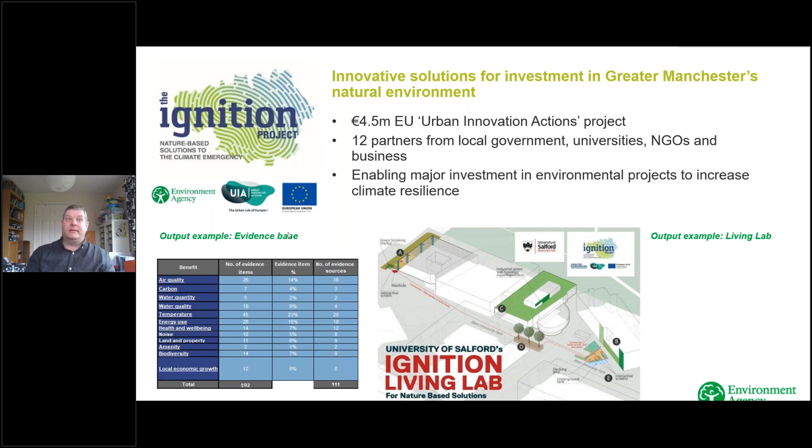And within Ignition, these are called funding streams, and we looked at a number of these. So really here, what we were trying to do was develop business propositions, income around these nature-based solutions. So we've looked at parks, existing and public, and looked at how you can bring more funding in to do more with parks, particularly around their functions for people in the environment and climate resilience.

We looked at green roofs, mapping the city centres of Manchester and Salford to understand at a high level which roof spaces could accommodate quite easily a green roof, and then we provided tools that allowed building owners to actually start to assess their assets. And we did quite a lot on SuDS, and particularly SuDS retrofit, which I'll come to now, looking at both individual sites, SuDS retrofit, and more neighbourhood scale, which is what we're talking about with Walkden.

The project itself had a wide ambition around SuDS anyway from the outset. As you can imagine, it's a climate adaptation project. The ambition here, or what we set out to do, was to design and develop and pilot investment cases, in the multiple, for retrofitting SuDS in GM: replicable, multi-benefit, multi-partner, public and private sector.

Before I go into talking about the co-investment work that we did around neighbourhood scale SuDS, I just want to reflect here, because it starts to again set the scene for what we did with Walkden. We all know that nature delivers value. Some of that's actually financial, monetary value, but we also probably know, and if we didn't, the Ignition project helped focus our minds, it's a long and, as I say, complicated and winding road to capture that value and to get people to pay for it.

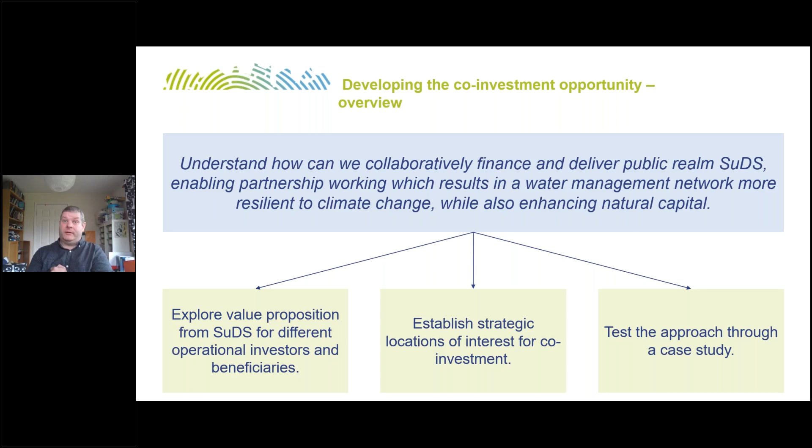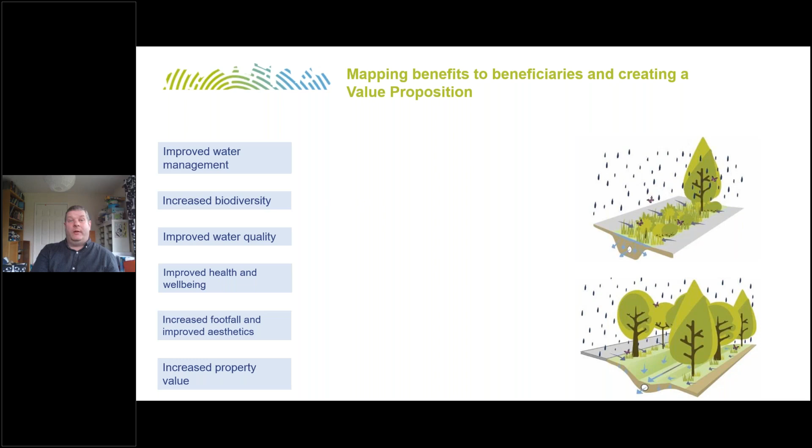And turning to the first thing, we spent some time mapping benefits. This was driven obviously by a quite well-known set of benefits you get from SuDS, which you can see on the left here. Also the evidence base that we'd seen, and we started to try and understand the beneficiaries that we had, locally and more generically, and understand the value proposition for them.

And as you can see, we've probably even missed some of the lines out here. It got quite messy quite quickly, linking up the benefits to the beneficiaries, talking to those beneficiaries about the investment, potentially talking to multiple beneficiaries about investment, all of which have different organisational setups, maybe different regulatory regimes, different funding, different timescales.

And actually those are some of the barriers that we already understood and perceived that we would need to overcome in terms of ignition, in terms of a replicable process that could really deliver this sort of co-investment on the ground in SuDS. We did decide maybe to give ourselves a slightly easier time, to concentrate very specifically on water management benefits and beneficiaries.

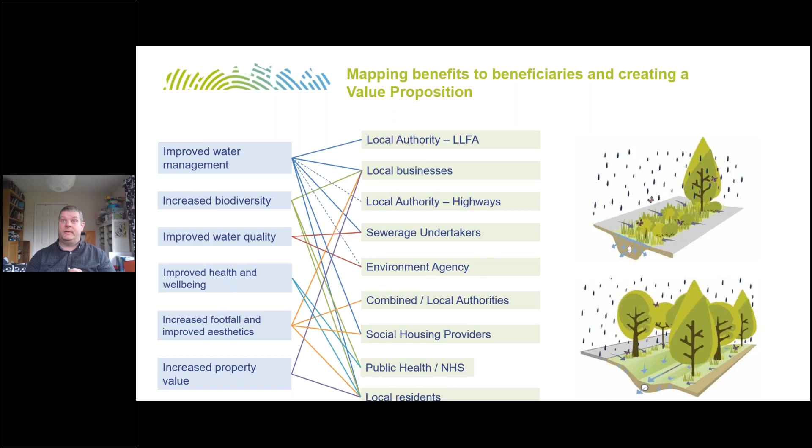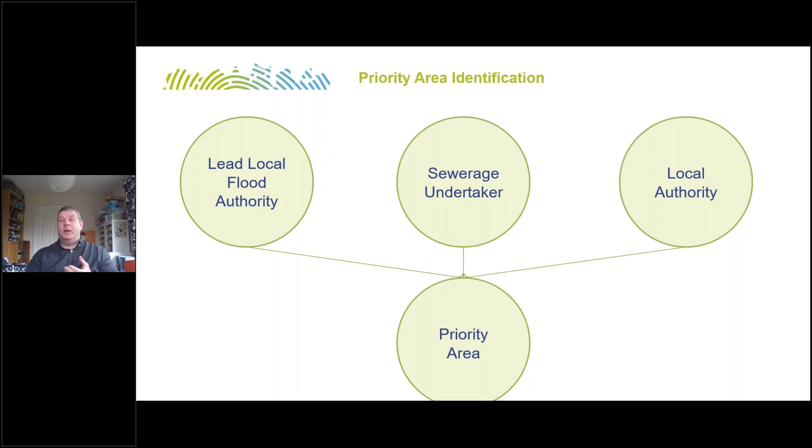So what this led us to do with our local authority partners, Manchester City Council, Salford City Council, and United Utilities, was really to focus on their water management benefits from SuDS, understand how these map together, and really start to drill down into data and evidence, so historic sewer flooding events, surface water flood risk, historic flood events.

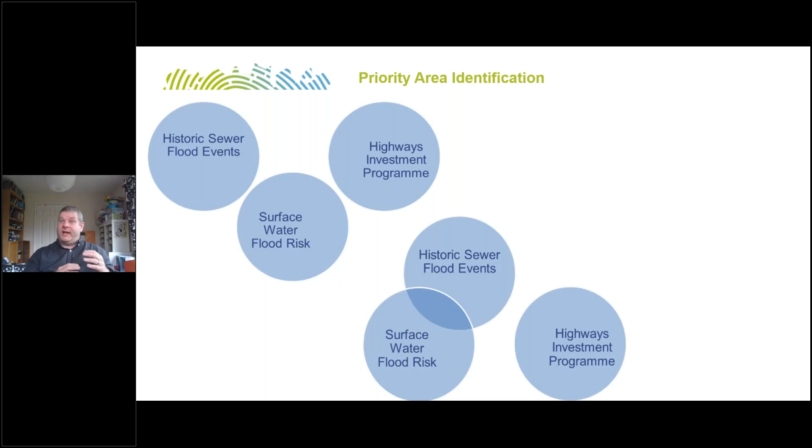We were also very interested in the efficiencies and cost savings that might be achieved through marrying up with grey infrastructure, so highways, who were within the local authority stakeholder group. So looking at highways investment and reconditioning programs, trying to understand where these things exist in space, and where we have all of these things.

And we were really well supported by our project partners in providing this data and helping steer us on this journey, particularly Salford City Council, who have been working around SuDS in highway schemes for some time and doing a lot of thinking, which put them in a really good place to help us get the data, steer us, and help us work with United Utilities.

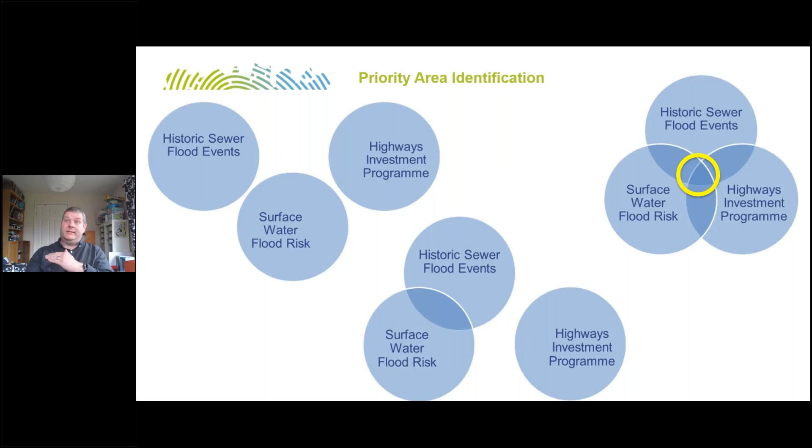And through working closely with Salford and with United Utilities, Walkden was identified as an area where we were getting a lot of those synergies and opportunities existing in one place. At this point, though, we didn't have individual swales or such features or really specific locations. So that was a deeper dive to really understand which neighbourhood we could trial something in. That was the case study.

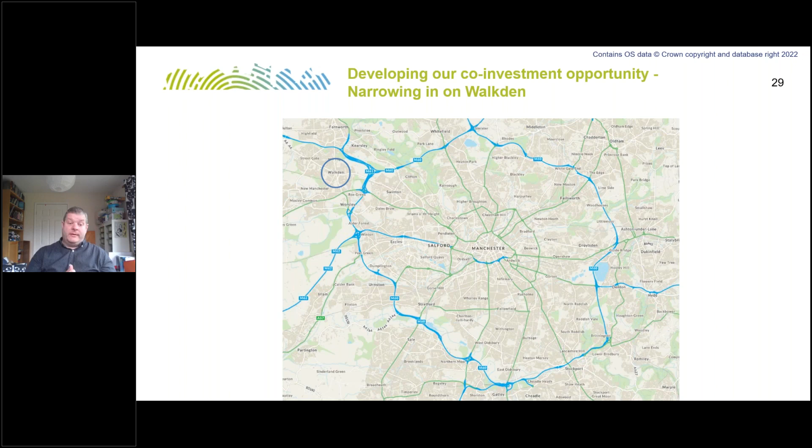That's when we brought on board EPG and HR Wallingford and started to think very much about what might be possible, what the detailed designs and costings might be, and also very importantly, what the performance of any given SuDS neighbourhood scheme would actually do for the various beneficiaries that I spoke about in the previous slides. So that's where we ended up, and I'll hand over now to Phil, who should be able to expand on what we actually did and what we looked at in Walkden.

Hi, I'm Phil Williams. I'm Technical Director at the Environmental Protection Group, and we were asked to look at the retro SuDS planning, conceptual design and cost estimation part of this development. Is it a SuDS presentation without the 4 pillars of SuDS? But it is important to have this in there because we use these 4 pillars to identify and to run our designs against them.

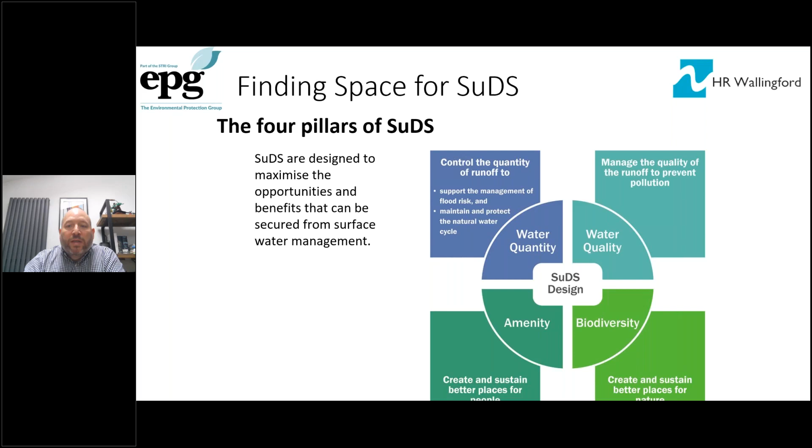So not only were we looking at the water quality and water quantity, we were also looking at the amenity and the biodiversity values of each of the retrofit SuDS principles that we were putting into the area of Walkden, which, borrowing Matt's slide, you can see where it is in regards to Manchester. It's a small town within

Salford, but this image, which was taken from Scalgo, where we use LiDAR, identifies the fall across the site. So the north of Walkden is about 50 metres to 75 metres higher than the south. Some of these falls are fairly steep across some parts of the site, and then it shallows out on other parts. So we had a lot of gravity issues to play with.

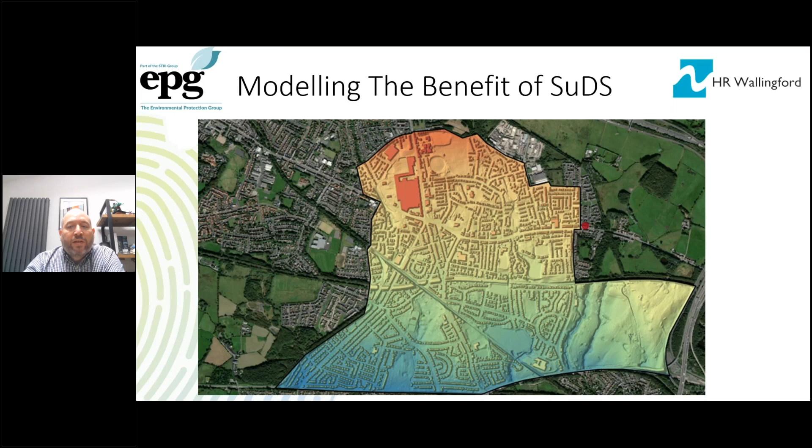We knew that there was a certain direction in which all the water fell, and that allowed us to identify some of the more suitable areas, as well as excluding some of the other areas just for the fact that the gravity system, the falls, didn't work within those areas. So we've got two slides here identifying the sites that we looked at.

So these ones were Wilbraham Road, Mereside Road, Leaside Grove, Springside Road, Whittle Street, and Manchester Road. And Manchester Road is more of the park on Manchester Road rather than the road itself. There are other areas within this site which would have been suitable for SuDS, or on initial aspect looked suitable for SuDS. But one of the most important things, if anyone was going to do this project again, would be physically walking across the site.

And as you walk across the site, you realise some of the constraints that maybe these areas have, that they might be at the top of essentially a catchment with no way water could get into these green areas, or there might be a lot of existing good quality trees, or there might be real potential for a lot of services beneath them.

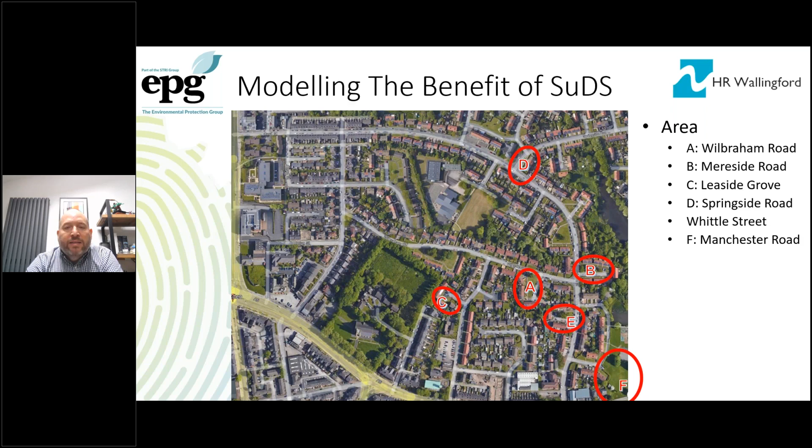So having a site to walk across was critical, and I did that a couple of times, and then myself, Bridget, and the Ignition team also did a final walkover, which allowed us to identify these areas as well. So the area was split by the railway tracks. South of the railway tracks, we had Walkden Park and Ride, Walkden Road, Birch Road, which due to the length of Birch Road, we split east and west, and then Rydal Crescent and Tarn Grove Crossing.

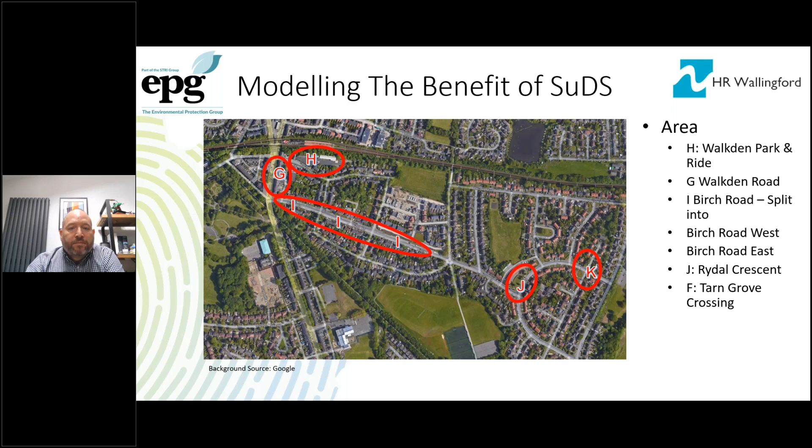We looked at, as part of the site, replicability of the SuDS solutions. We looked at more common SuDS features, so bioretention zones, swales, rain gardens, pervious pavements, tree pits, while keeping some of the more new and unusual ones, such as blue roofs and smart systems, out of the study, just so someone could pick up this project, look at what we've done, and say we can copy that, we can do this design on our area of land without having to have some real key inputs and key understandings.

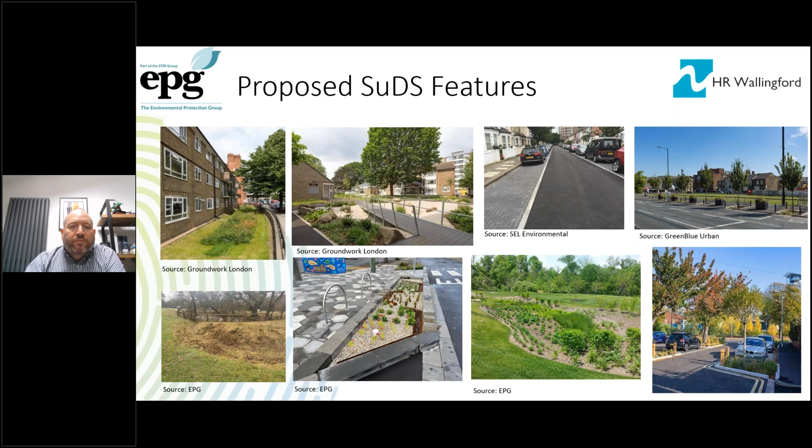So for each of the areas that I identified, we looked at them and we undertook a design. We calculated the attenuation volumes. We then did a cost analysis and then a benefit analysis, and that was for each and every one of them. And what I've done here is I've extracted some of the more unusual ones or ones that give a good flavour of what we've done.

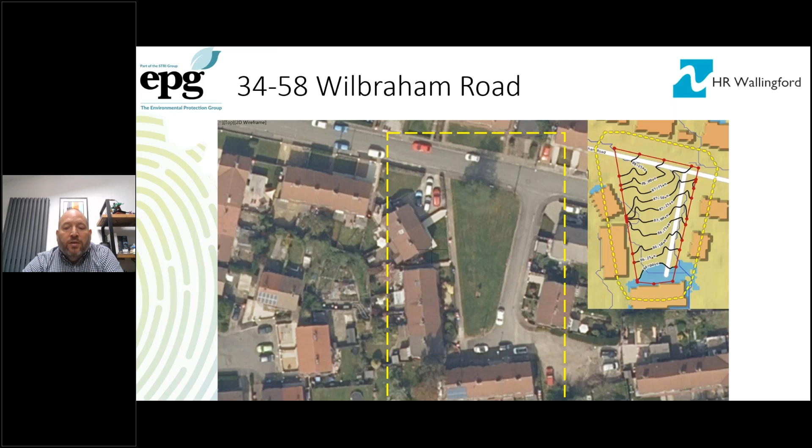So the first one is Wilbraham Road, and we used the same Scalgo LiDAR measurements to look at the falls across the site. So from the top road down to the bottom houses, you're looking at about 3 or 4 meters of fall. We had the site walkover, and as you can see, there's also 2 good quality trees and a new tree there, which we could probably, as we're excavating, pick up and replace and put elsewhere.

We came up with this solution where it was a bioretention zone, which was draining the road to the north and to the east of the site, blocking up a number of the existing gullies there, and then connecting the road into this bioretention feature. Because of that 3-meter fall, we've put in a number of earth check dams, so the water didn't run right the way down through the bioretention zone, overwhelm the bottom of the SuDS feature and then flood the road at the bottom.

The maximum depth of these features varied between 200 mil and 500 mil, but we tried to keep them fairly consistent where possible, at about that 300 mil open water mark during the key peak storm event. And each of these systems would connect back into the United Utilities asset. We used the minimum allowable orifice size of 50 mil to connect into United Utilities. So rather than giving ourselves 1 litre a second, 2 litres a second, we had that minimum orifice plate, and that was the key restriction for these retrofit SuDS features.

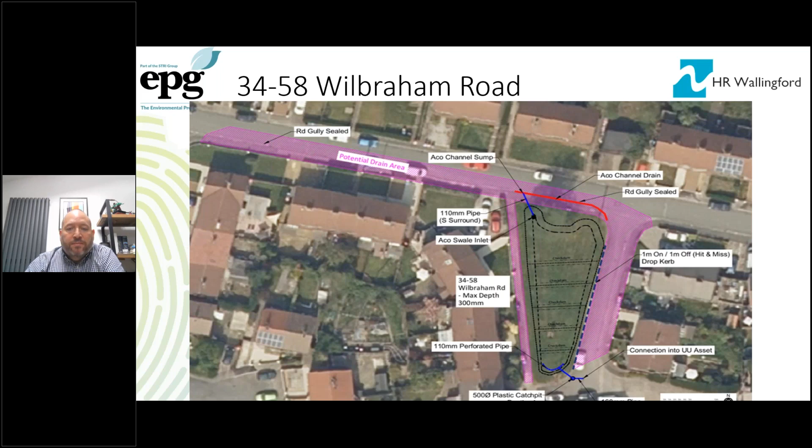We also undertook a landscaping review. So we produced a list of critical and important landscaping planting schemes that you could use on these sites, and they tied into the Salford landscaping scheme. And we produced these nice graphics to show how the site would look when it was finished.

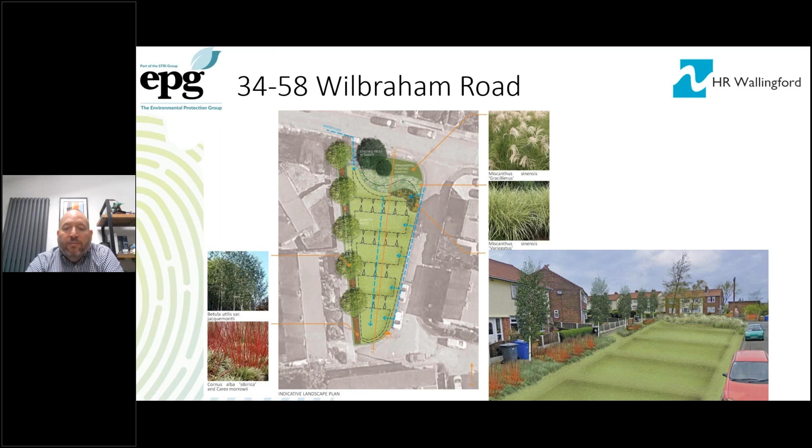One of the big issues when you're doing retrofit SuDS is constraints. Certainly in heavily urbanized areas like Walton, you would have lots of services - water, gas, cable. Some of them will be generally variable in depth, but we're anticipating they start from about 750 millimetres to a metre down below the ground. So keeping things shallow often benefits by avoiding these services.

We also expect some of them will be marked, whereas others won't be. So we anticipate gas would be marked, but maybe cable wouldn't. Obviously, some of the sites we identified we dismissed because of services - one of them had a significant amount of cable boxes and electricity draw pits close by. That would be a real big constraint, and it would be difficult to dig anywhere in that location.

A lot of these areas had natural tree growth, so there didn't seem to be any specific planting arrangement - trees had just grown there over time. Some of them were good quality, some were poor quality. The ones that were poor quality we suggested removing, and the ones that were good quality we designed the features around. But there were some that had been taken down for one reason or another, so there were also tree roots and stumps that would need to be managed when doing the retrofitting.

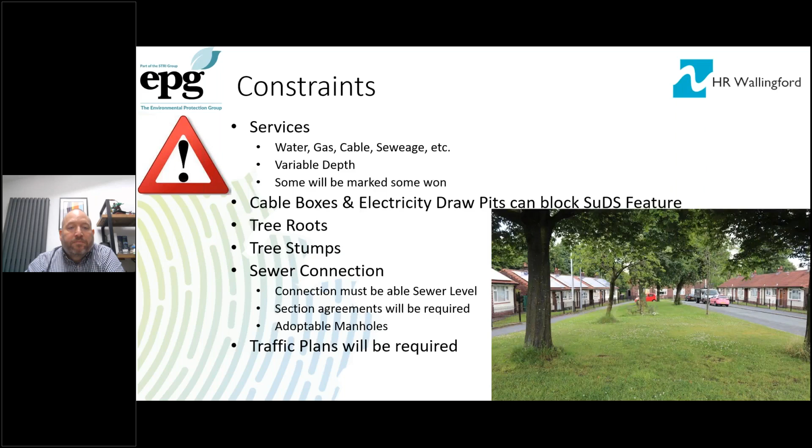One of the things we identified, or we assumed, was that there was no contamination and no high water table. But we would suggest site investigations be done prior to any work on these or any other retrofit SuDS around the Manchester area.

One of the key things is this area is very urbanised. There's a number of schools and primary schools. So on any of these walking routes to the primary schools, we try to keep the depth of the water fairly shallow, just to avoid any health and safety issues with children falling in or hurting themselves. And then when full, we suggested that the velocity of the water movement through the open water was very low as well.

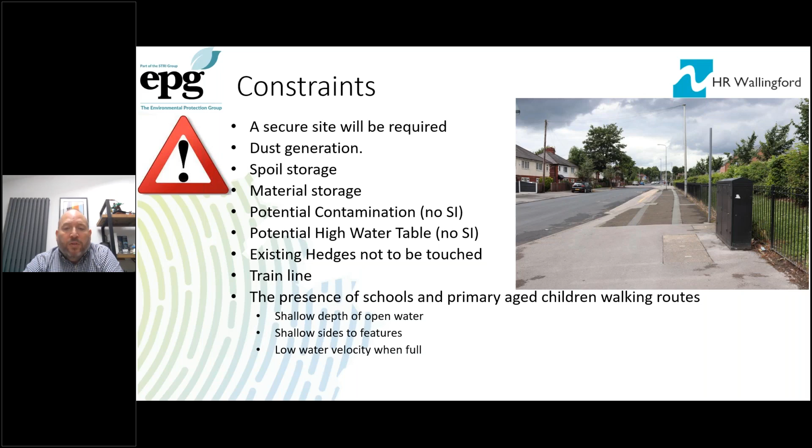What we did for each and every one of these sites is we undertook a cost analysis. So for Wilbraham Road, we identified that there was £13,000 worth of material cost. There was earthworks as a large component, and then on top of that, disposal of the soil. This disposal would increase in cost if there was any contamination, but we considered it clean.

And then we identified an annual maintenance charge cost to maintain this area. One of the things to understand is we tried to keep everywhere as independent, as separate as possible. So someone could come along and do one zone, but that added costs to the earthworks, to the groundworkers' mobilisation costs. So if you were going to do two or more of these retrofits, there would be a cost saving because the groundworker wouldn't need to mobilise twice.

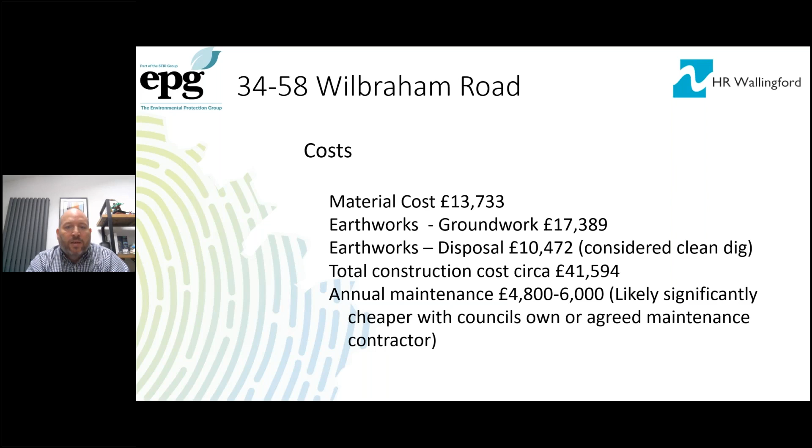We also undertook a BeST analysis - the image might be a little small for you to see, but when you receive the presentation, you'll be able to see it in better quality. It identified the areas of best benefits, and the big one was health. We didn't really look at the best qualities for water management because that's what Bridget will be covering later in this presentation, so we excluded water from our benefits. So this net £17,500 value excludes the water benefits as well - so there is greater value to it than what's being shown here. These are the factored improvements to the locals for having this green space, and the benefits the locals will appreciate from implementing the retrofit SuDS.

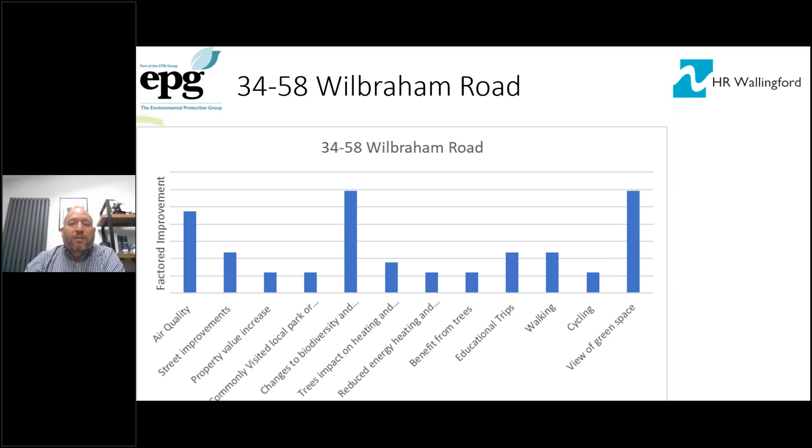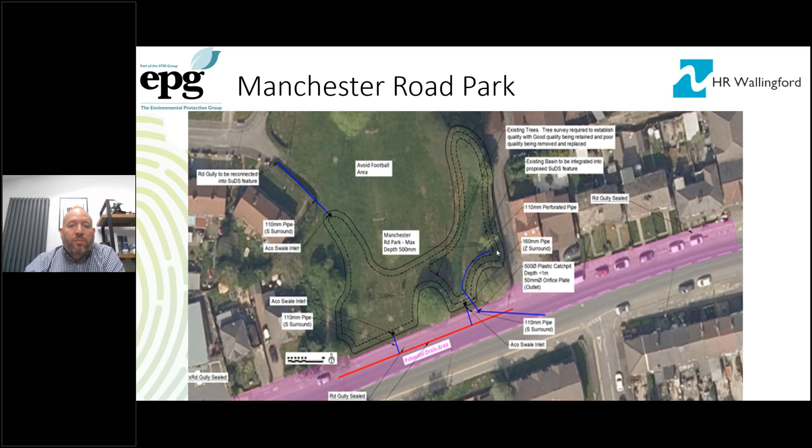The next one we did was Manchester Road Park. This was a large park, but there was an area at the bottom which wasn't being used. So we looked at expanding a large flood retention zone into this area, taking a large area of Manchester Road into this flood retention zone. But what we were key to do is avoid actively used parts of the park, such as the football area and the playground.

Park and Ride was Walton was also looking at retrofitting this industrial estate into a park and ride. So we proposed changing that from just traditional hard standing areas to a pervious solution, and the benefits that would have on the drainage infrastructure, because there would be a significant reduction in volume of water coming from a traditional hard standing impermeable site to one with porous pavement.

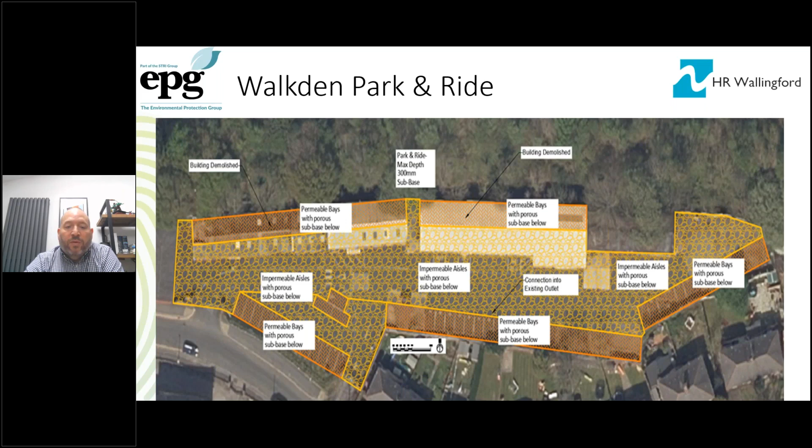What we identified is there's not much of a typical cost uplift for pervious pavement and resin pavement. Resin pavement is quite popular now and has the biggest uplift, whereas it was £10 a square metre uplift for pervious block pavement in comparison to traditional pavement.

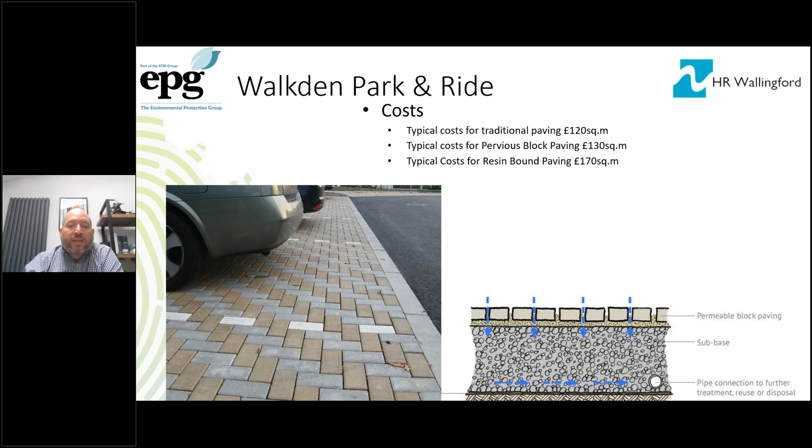One thing to note is that uplift might get eaten into by the fact that type 3, or pervious gravel, is generally 10% more expensive than a traditional type 1, but it also bulks 10% more, so it has a cost neutrality associated with it. You need 10% less type 3 than you would type 1. So you'd probably start to claim back that £10 per square metre by using porous aggregates, which you would need to do.

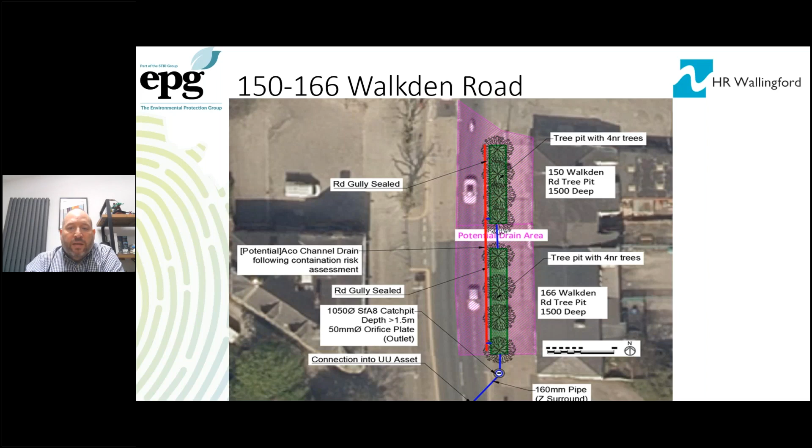We looked at a number of tree pits. The first tree pit area we looked at was the busy Walkden Road, where we went with a traditional in-ground tree pit, banking 2 sets of 4 trees into this area. You can see here we were looking at draining half of the road into these 2 tree pits, and we did a number of sections for these tree pits to show how they would sit within the pavement.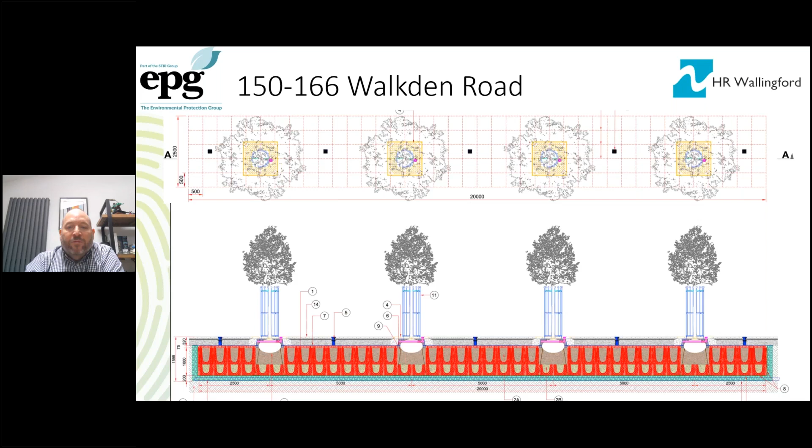What we also did was a graphic to show how it would look now and how it would look once we implemented these tree pits. You can see there's a real big difference to having those tree pits, how much nicer it looks.

Birch Road West is a fairly complex site. It was quite long, and it had a number of existing tree pits, or trees, within it. But the locals were using the wide pavement for car parking, and a number of the trees that were there were generally in poor quality if they were there at all. A lot of them seemed to have been reversed into a number of times and had just died.

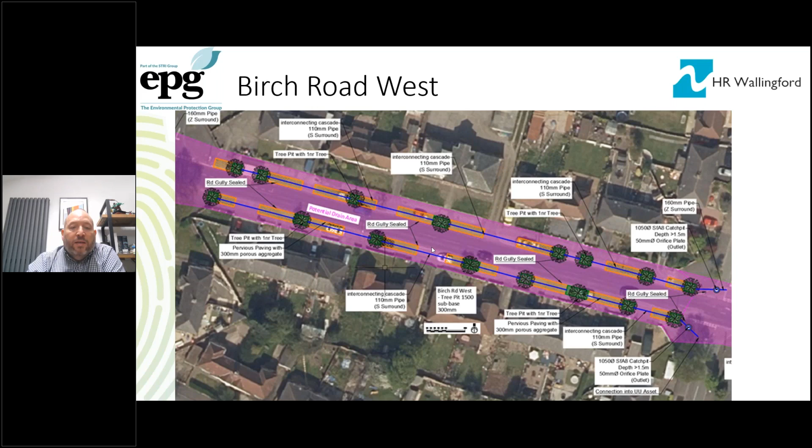So what we proposed is a more formalization of the parking and the tree pits, bringing in pervious pavement again to drain the roads with a tree pit system, with the tree roots sat beneath the pervious pavements. Again, we did a graphic of how it looks now and how it could look. I think you'd agree with me, it looks much better once you start implementing these trees.

Again, we did a full costing analysis for the whole of the site, including the individual tree pits, where it cost for the pervious pavement, the groundwork, and all the ancillaries. As I said previously, each area is priced individually, so if you're doing 2 or more areas, the more areas you're able to do, there is a significant economy of scale savings.

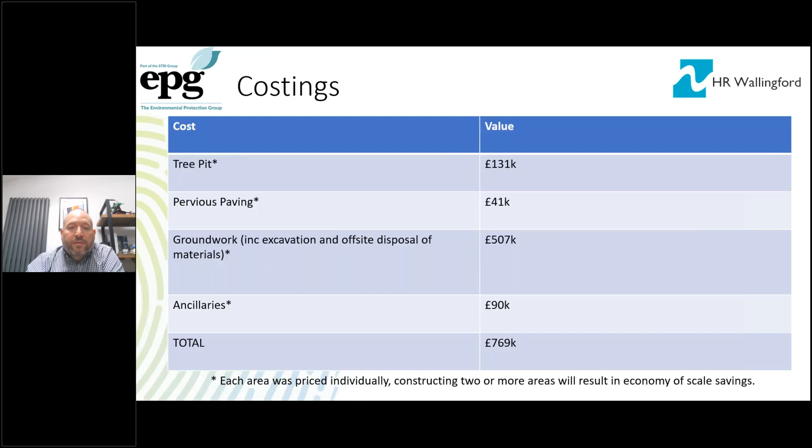And then we did a best value assessment for the site, and Bridget will lead on into this. We didn't look at any of the water benefits or flooding benefits from implementing the SuDS, because Bridget would be looking at that in much greater detail. But one thing we noticed is we used the Bridle and Stringer paper from 2009 to price our trees, because it seemed to give a much better value to a tree than the best figures available at that time.

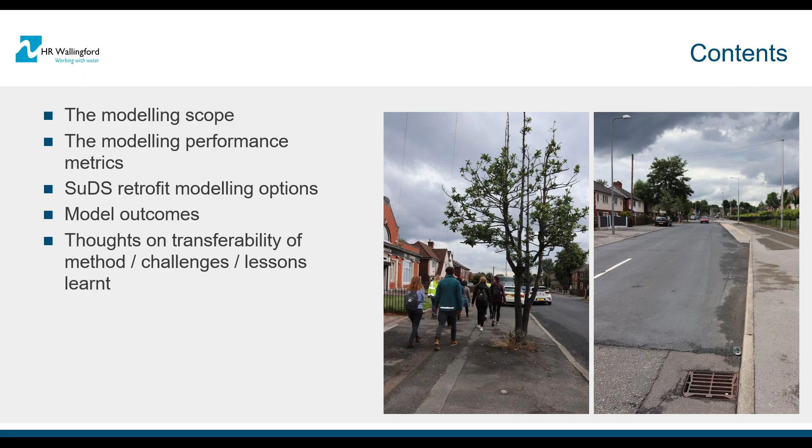What we were doing within the modelling is taking Phil's outline designs of feasible SuDS retrofit solutions for the Walkden pilot study area, and assessing the impact of those SuDS on surface water flood risk. We're looking at the areas of surface water flooding and specifically individual properties and pieces of critical infrastructure. We were looking at the sewer performance from a flooding perspective, and the impact of that flood risk both internally and externally to properties in the area.

We were looking at the combined sewer within the area that the pilot study sat, and how any retrofit interventions might influence that combined sewer overflow performance, and also the flows at any pumping stations in the system, and wastewater treatment works.

To contain and characterise all this, the modelling approach needed to be robust and very clear about what we've done, and replicable to other locations in Greater Manchester if similar pilot studies were rolled out in wider areas.

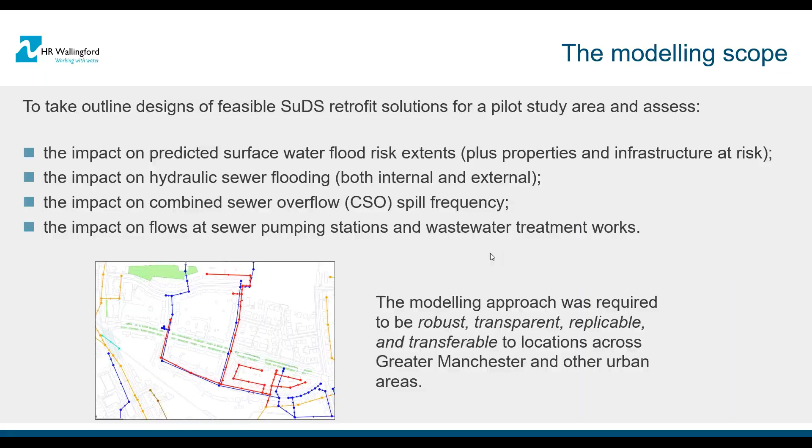These were the performance metrics set out by the stakeholders in the project, what they wanted to see in terms of how the SuDS were influencing the system itself, but also performing individually.

In terms of the SuDS themselves, we were looking at how much volume was being infiltrated at individual locations and attenuated before being transferred back into the sewer.

We were looking at how effective the different SuDS were at different locations in actually capturing runoff, because your SuDS are only going to be highly efficient if they can capture a significant proportion of runoff, and linked to that is how well the storage provided at individual locations was utilised, how efficiently that was utilised in any event.

We looked at surface water flooding in terms of extents, flood depths, property counts, and critical infrastructure counts, both internal and external. We looked at the sewers themselves, the surcharge and flooding return period at sewer nodes, and the actual peak flow rates and volumes within the sewers.

And then we looked at the combined sewer spills, frequencies and volumes, and the pumping volumes as well. So a lot of very detailed metrics, and as you'll see now, those metrics are absolutely key to defining the detail and rigour needed within a modelling approach to ensure that you can extract that sort of information.

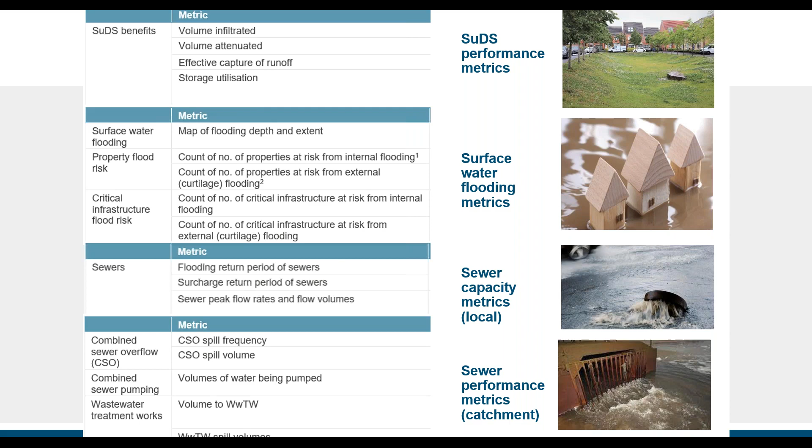So the different types of SuDS models that we considered and reviewed as part of defining this replicable modelling approach for the area - we went right from the very simplest approach to the most complex, looking at the pros and cons and the benefits and constraints of each.

At a very high level, option one is to take an existing sewerage undertaker's one-dimensional 1D model. Most sewerage undertaker models are 1D, so directly using this model without significant adaptation is obviously the simplest, easiest approach. All it requires is removing an area from a runoff subcatchment that represents the area of runoff that would be captured by a SuDS - effectively just taking out and assuming that entire impervious surface area is now not contributing to the sewer.

Option one obviously gives you the highest level of performance efficiency, but it's not necessarily representative of exactly how the SuDS will operate in practice, because clearly SuDS won't take all the water out for every event.

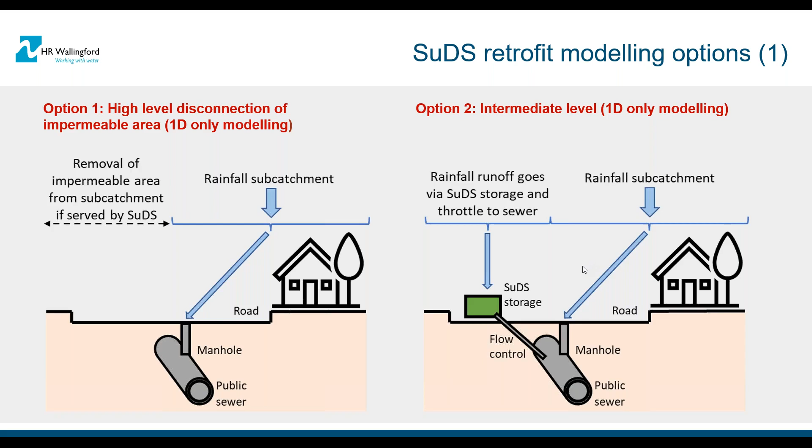Option two becomes a slightly more intermediate level. It's still working with the 1D model only, but you are adding in a storage and a flow control node to all or part of the runoff subcatchment. So you've got a bit more refinement in there, but you're still looking at something which is a very simplified representation of the SuDS in the system.

Option three, included for completeness, doesn't use the sewerage undertaker 1D model at all. There's no sewer representation here. It's just a two-dimensional surface mesh with the SuDS represented either as flow paths in the mesh or as storage, as depressions representing storage.

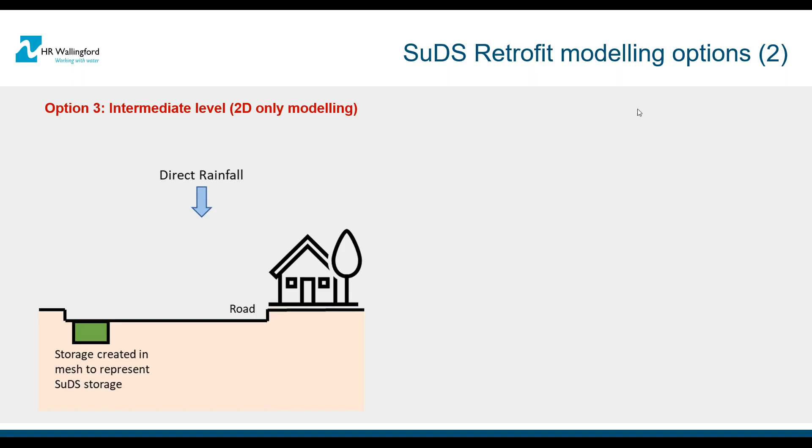Option four is more of an intermediate level. This uses the 1D sewer model but still applies rainfall to the simple subcatchments approach, and also adds a 2D surface mesh that water can be spilled into and out of.

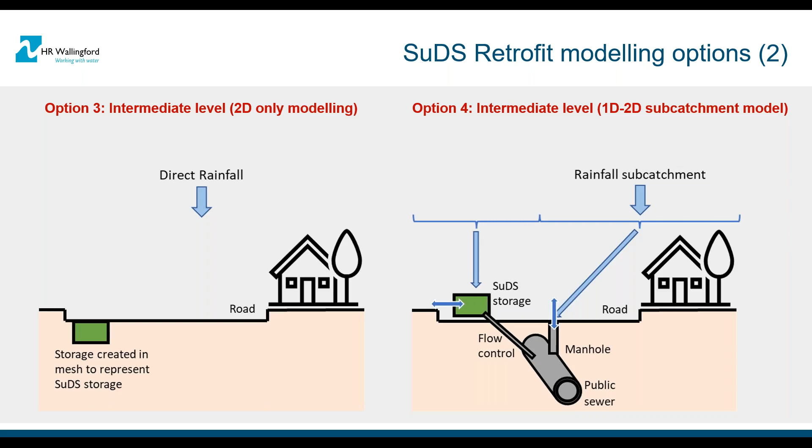The final option is option five, and this is the most detailed and comprehensive representation of SuDS. It's a full 1D-2D linked direct rainfall model where the rainfall is applied directly to the surface, with full representation of the SuDS, the infiltration, the evapotranspiration, and the interaction between the sewer performance, the SuDS performance, and the surface mesh.

So this, as you'll see in the next slide, is the option that allows you to represent all the interactions that are going to give you those performance outcomes that the stakeholders are looking for.

You can see that modelling SuDS requires a different approach to standard drainage modelling if you want to get all the impacts right. That's because the proportion and the rate of runoff into the receiving pipe system is a function of the type and the configuration of the SuDS.

So what you get out of the SuDS is going to be completely dependent on the relative surface area, on the volume, on the flow control rate, on the evaporation and infiltration rate. So a lot of different characteristics.

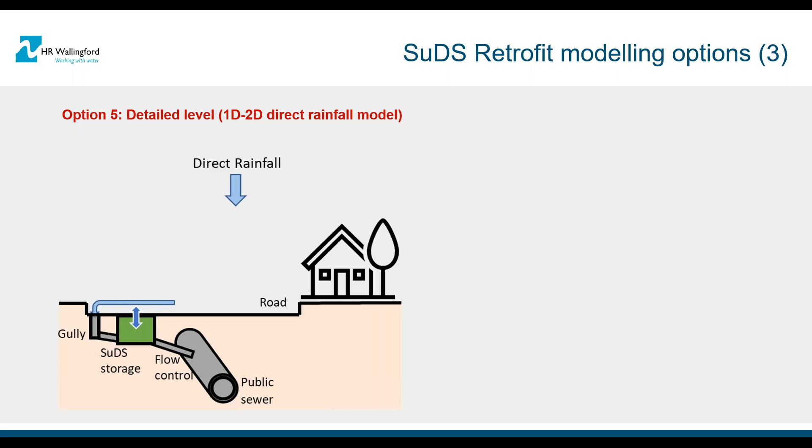This just summarizes what you can and can't get out in terms of parameters from the different options. Sorry, I think one thing has dropped off the bottom, which is pluvial flooding. But what you can see is that it is option 5, this detailed level of modelling, which allows you to get all the parameters, the performance metrics, from the model.

I think it's important to remember at this stage that the use of modelling here is not about option appraisal. It's not about optimizing, seeing how much benefit you can get from the proportion of SuDS or the proportion of impermeable areas served within a catchment.

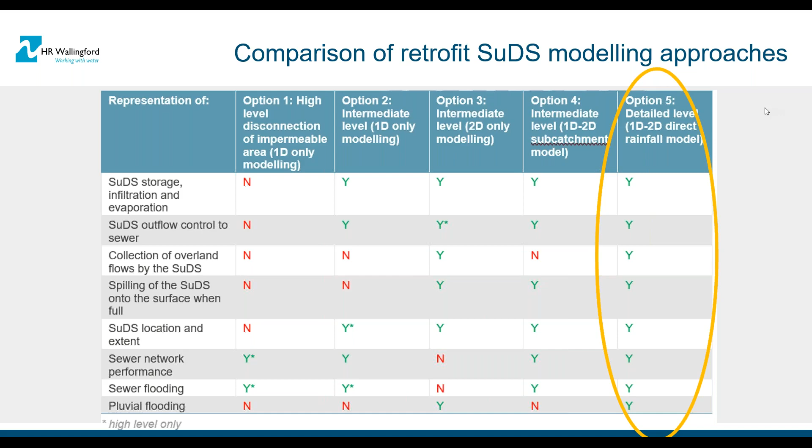This is about taking defined SuDS, defined areas, looking at the maximum volumes we could put in the model, and then looking at the model's specific modelled impacts of those solutions. That's rather different to quite a number of other studies that have already been done using modelling approaches.

So the modelling method we use, very simply, or at a relatively high level in this flowchart, the first three tasks are about how we took the baseline 1D sewer model from United Utilities and adapted it so that we could subsequently include the retrofit SuDS using that option 5 approach.

So we needed to extract the sewer model and see how it performed. We needed to simplify that model, cutting it down so that we had representation of the pilot study area and upstream and downstream areas that either contributed flow to that study area or were key influences on that study area's performance.

That also gave us points downstream where we needed to extract those performance metrics. What we needed to do is extract only the part of the model and the characteristics of the model that we needed to give us those performance metrics. That was crucial to minimise the model runtime, the model complexity, and the number of simulations we needed to undertake, because that was also obviously critical.

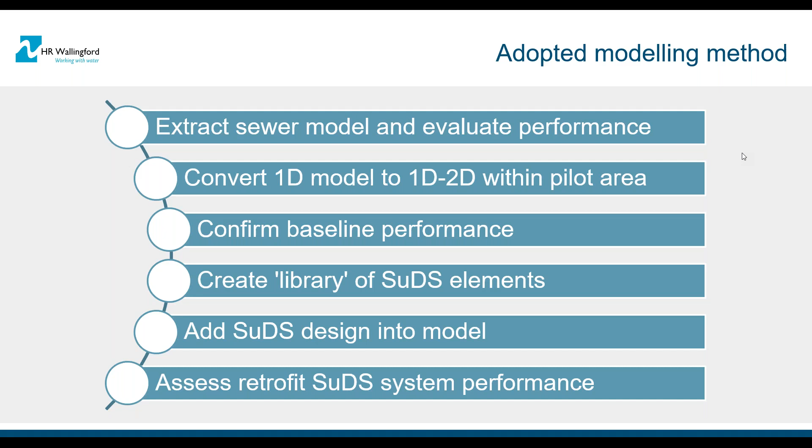Just a little bit about rainfall. We used 3 different rainfall types for the effect assessment of performance.

The first type of rainfall we used was the standard design storms, which would be used routinely for looking at sewerage performance. We looked at both present day and climate change uplifted summer rainfall, and multiple return periods, which were defined in the scope because that's what you needed for their funding application, and multiple durations to ensure that all the critical durations or all the key points in the model area were represented within the model outputs.

This was the rainfall that was then used to assess those surface water flood risk and sewer flooding and surcharge metrics, so that could be compared to the standard outputs from the existing model, the 1D model.

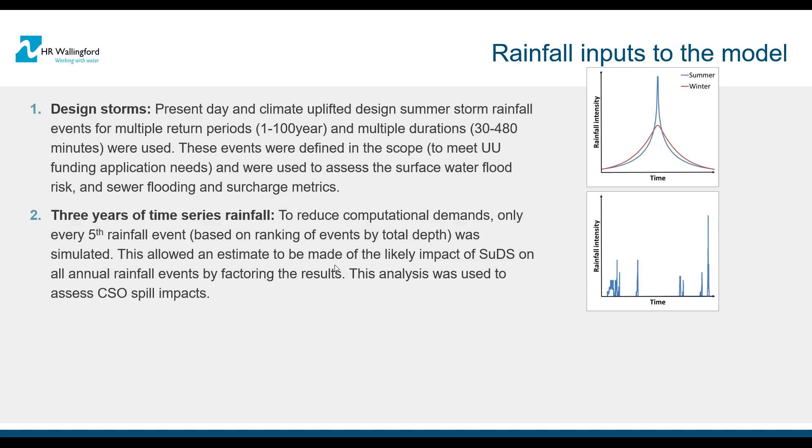We then used 3 years of time series rainfall. But we had to make adjustments to that time series in order to ensure that the computational demand of doing that was realistic. So we got our 3 years of time series of duration of rainfall, but we only picked every 5th rainfall event, based on ranking those events by total depth. That gave us a good picture of the performance of the system over those 3 years, using a range of representative rainfall events.

And that time series rainfall was what was used to assess the CSO spill impacts, the frequency and volumes.

And finally, we picked 2 rainfall events that represented a regular rainfall event in the system, a 4 millimetre event, and also a 12.5 millimetre event, which reflected a significant event that's going to happen maybe 3 or 4 times a year. These two were used to infer the benefits of the SuDS in terms of how much volume they were going to infiltrate and how much volume they were going to attenuate into the receiving sewer.

And those also were used to infer the volumes that were potentially the impact on volumes pumped in the sewer catchment and flows to the wastewater treatment works.

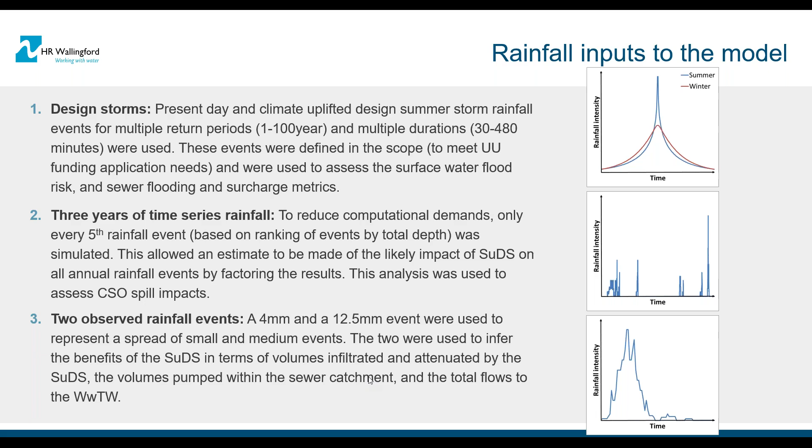In terms of the standard SuDS library, the standard SuDS representation within the model, essentially we had two slightly adapted approaches. One for things like tree pits, where the area of the SuDS was relatively small in comparison to the contributing impervious area, for which evapotranspiration was not included, and for which the area of the SuDS was not taken out of the 2D mesh.

So where the area was not considered significant, we used what we called a point SuDS representation. For larger areas such as swales and large bioretention areas or basins, we used a storage node that had the full area considered. But essentially they were very similar.

A new storage node was included, and that storage included level and plan area elevation curve and the infiltration and evapotranspiration rate. We created new gully nodes to represent curbs that would convey the water from the road into the SuDS. We put in non-return valves and orifices to make sure we were controlling the flow back into the sewer, as Phil has discussed.

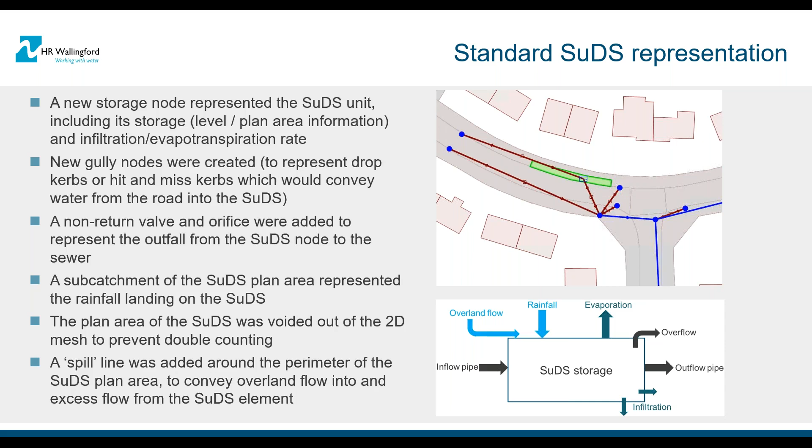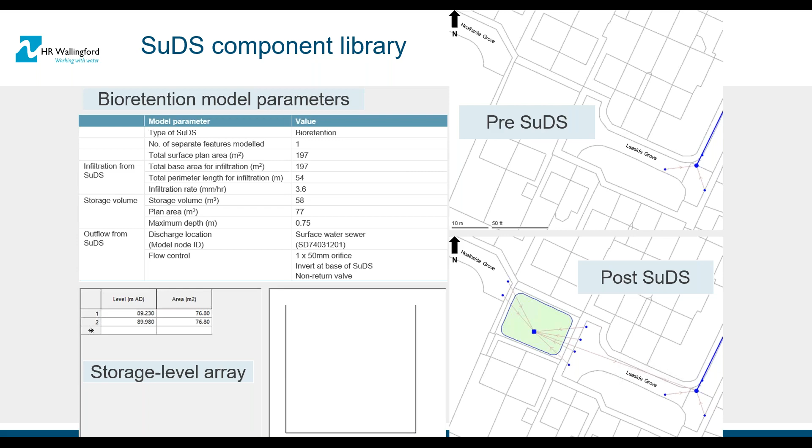And this is what the SuDS component library looked like. For a bioretention zone, you've just got a consistent representation of all the various parameters that you're putting into the model, and then a storage level array, so we've got consistent documentation. We also had consistency in how the nodes and the connectivity between that was defined through the modelling.

On the right-hand side, it's an image of the model as adapted to include the retrofit SuDS, all the connections into the sewer network, and from the new gully nodes. And you can see here this is a location where there's both a combined sewer and a surface water sewer as well. So you can see how closely they lie in the system,

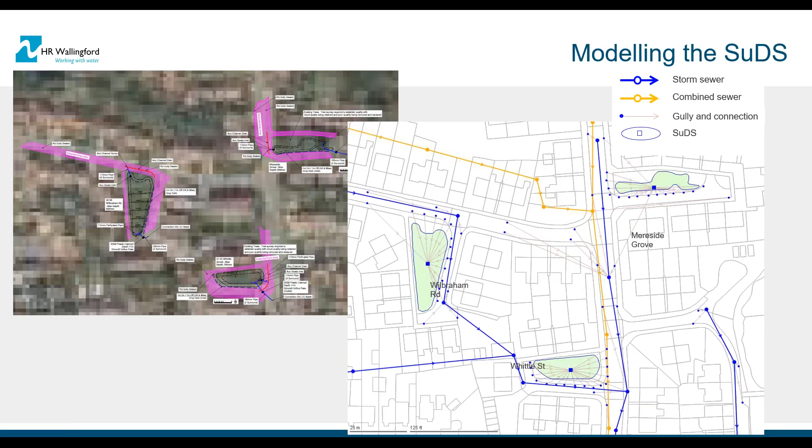and that does add extra complexity. And this is just an image showing Birch Road with its multiple bioretention zones, or tree pits and bioretention zones, going all the way down the street, and the complexity of representing all the surface water interactions with that.

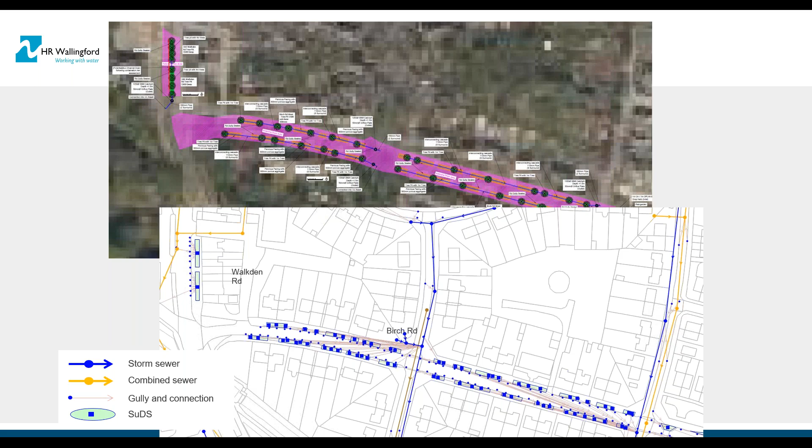Just before I talk about the outcomes, I just thought I'd mention the two different scales of reporting. We're interested in the local area, obviously, and that's the pilot area itself, which is represented on the left. And on the right, it gives you an indication of where that pilot area is in terms of the combined sewer catchments and the wastewater treatment works. So they're very large catchments, total sewer catchments, and there's a relatively small local pilot area that we're dealing with.

So this is just preparing you for the fact that clearly the impact on a much wider network is going to be inevitably limited.

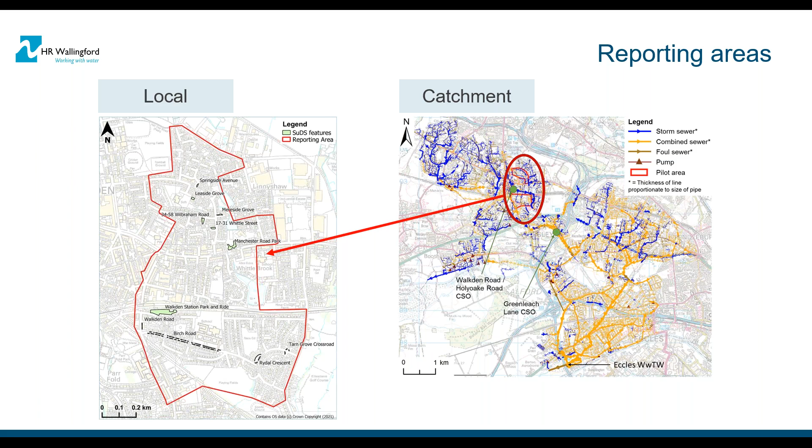And this gives a bit more context for the scale of the SuDS and the scale of the area that they're managing. So we have got a plan area of SuDS proposed, as described by Phil, of over 8,000 meters squared, and that gives us a storage volume within those system components of 1,500 meters cubed, and the impervious area discharging into those SuDS was

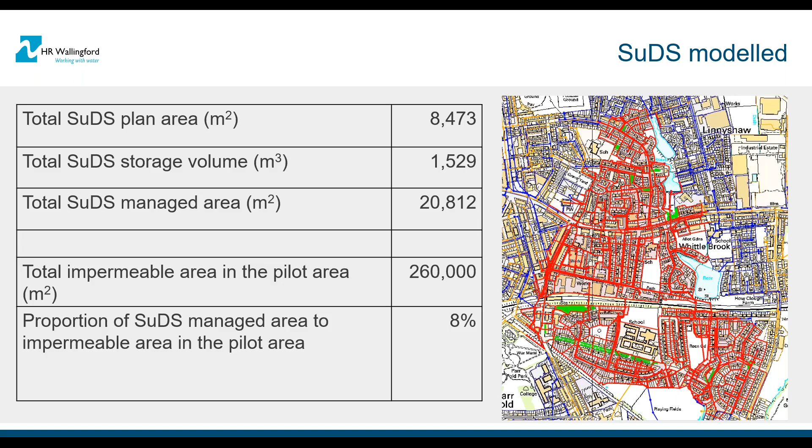nearly 21,000 meters squared. But in contrast to that, the total impermeable area, even in the pilot area itself, is over 250,000 meters squared. So when you compare the proportion of the SuDS managed area to the impermeable area in the pilot area, you're only talking about 8%.

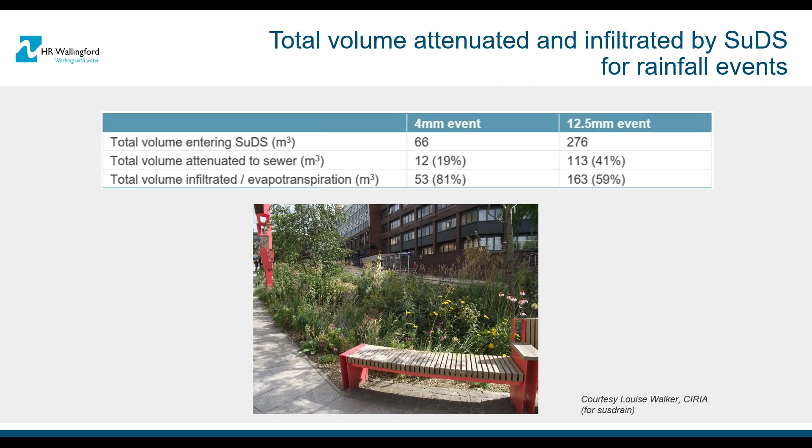Looking at these representative rainfall events, the 4 millimeter event and the 12.5 millimeter event, for the 4 millimeter event, you can see here that the SuDS do really well. They're infiltrating or evapotranspiring over 80% of the event, with less than 20% being attenuated to the sewer, and that evens out a bit for the 12.5 millimeter event, but still being very effective.

In terms of surface water flooding metrics and the proportion of area that's shifting or reducing at different flood depths, you've got a much lower impact, and that reflects the proportion of the impervious area that you're actually managing to intercept, but also is a function of where those flooded areas are.

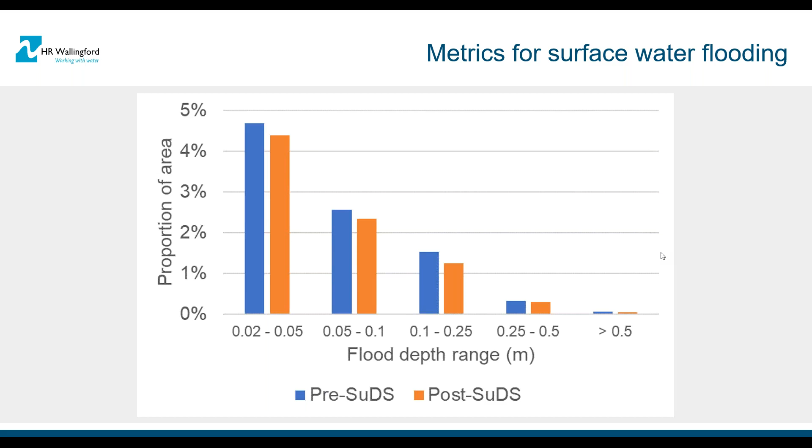So these SuDS were selected based on many different characteristics and many different drivers, and the schemes weren't specifically designed to address a specific flooding problem. So how well they did at reducing surface water flooding was almost an extra benefit rather than a specific objective for the individual locations.

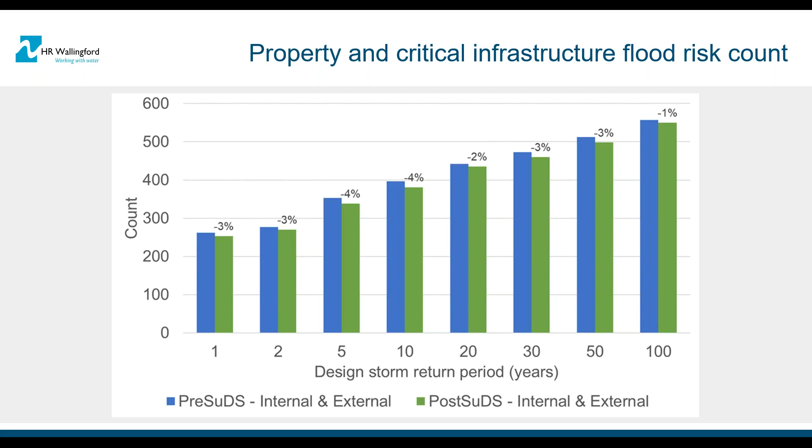And again, you can see here that you're getting reductions, you're getting improvements, but they're relatively small, not huge changes that you're looking at here.

So it is, as you would expect, reflective of how much of that upstream area you're actually dealing with, and also whether the system is a separate sewer system or has substantive flows within the combined system, where you're going to have less of an impact.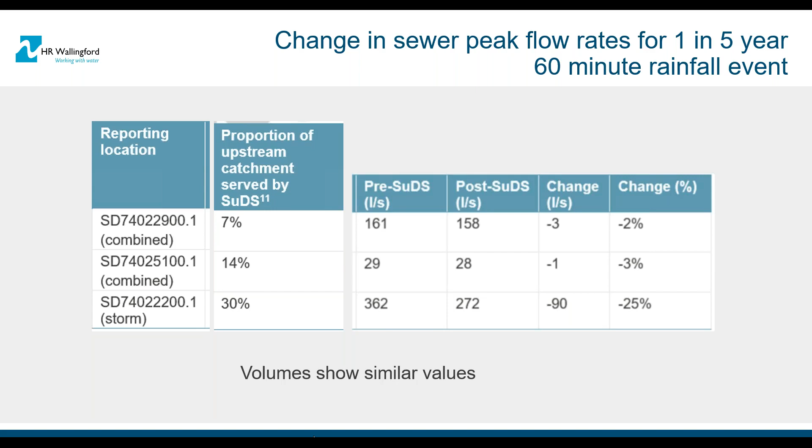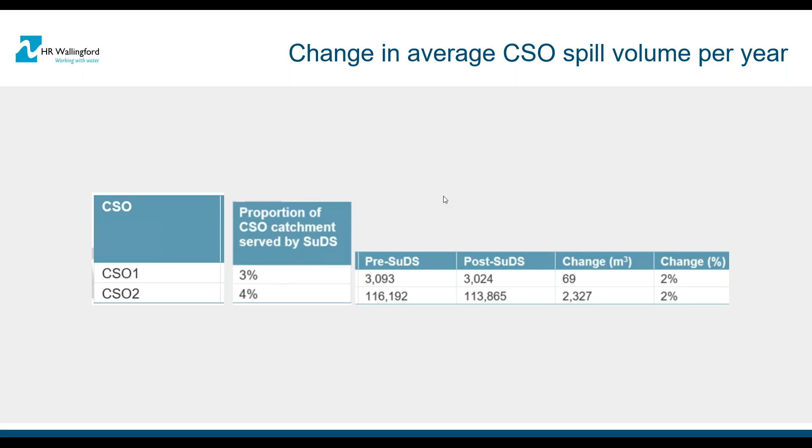In terms of CSO spill volumes, we're recognising that the pilot study SuDS area is a very small proportion of the combined sewer catchment, and therefore the change of 2% in the right-hand column is commensurate with the level of management being afforded by the SuDS.

So in terms of lessons learned, I think we learned a lot from undertaking the study. What we would probably say is that the value of taking a nested approach is really clear. So use simpler modelling options to give you an overview of the possible or potential benefits offered by different SuDS pilot areas, different locations, different types, and that's a really important first step.

And also as a mechanism to give you more understanding of the system and the likely benefits, so that you can potentially cut down on the metrics and the simulations to be carried out using the detailed modelling. But with the current sort of funding model and the needs of that funding model, detailed analysis is obviously needed.

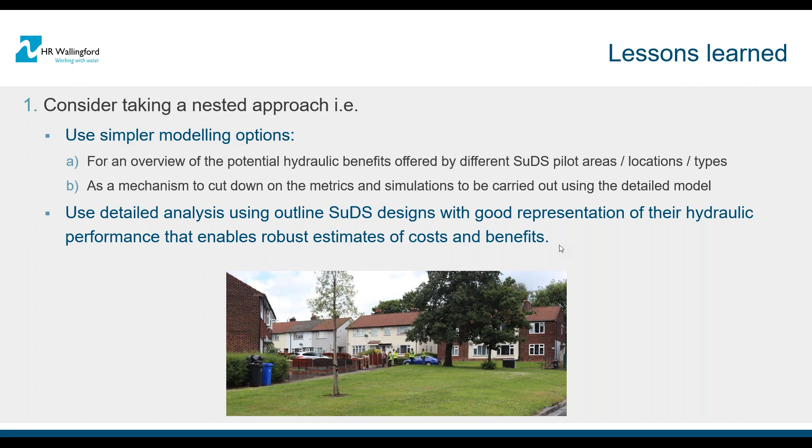But having taken the simpler approach, you can then use that detailed analysis to put in your outline SuDS design and provide a good representation of that hydraulic performance that will enable you to have a robust estimate of both the cost from Phil's work, but also the benefits to the receiving sewers and flooding.

The other thing that we would say from this is the importance of using time series rainfall and how much richer the information on SuDS impact is from using time series rainfall than you're going to get from design storms. That time series rainfall is going to reflect all the antecedent conditions in the SuDS prior to the events occurring.

It's going to allow you to look at the combined effects of different critical durations in the system, because we need to recognise that SuDS and storage systems and pipe systems will be under stress at different duration events. Time series rainfall gives us a much better handle on threshold frequencies, so under what conditions SuDS are full, and it gives us a much better idea of how the system can perform under different summer and winter conditions.

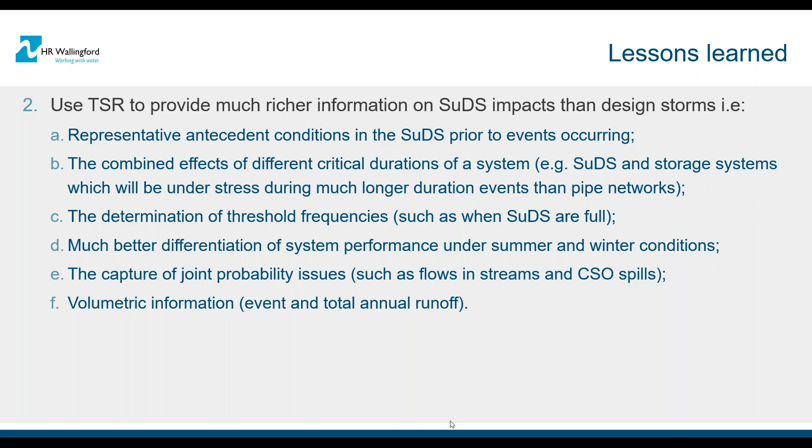And then, of course, it allows joint probabilities such as flows in streams and the combined sewer impacts as well. And crucially, it gives us an idea volumetrically, at an annual level, of how much runoff we're taking out of the system through the year, which design storms don't.

Recommendations, and these take those lessons learned forward: identify and look at the existing modelling available for the study area first, so that you really understand what that's telling you, and use that to pick your pilot areas.

Through engagement with the stakeholders and the people that are likely contributing finance for the scheme, try and develop a set of performance metrics that are going to not only meet the needs of the project appraisal process, but also the rest of the stakeholders, ideally recognising the likely value of SuDS for non-extreme rainfall management for those regular events, and recognising the implications of different metrics on the modelling approach that can be undertaken.

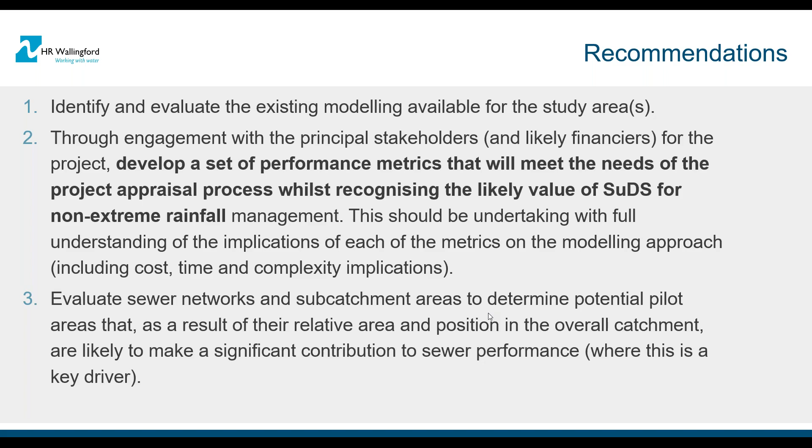Evaluate the networks and subcatchment areas to determine those potential pilot areas that might give you the best contribution to sewer performance. But obviously this is going to be dependent on what sort of stakeholders you've got and what's of greatest importance, and also all the links to potential highway infrastructure upgrades and other projects that might be going on in the area. So there's always multiple things to consider.

Simple area disconnection analysis can be used to give you a very first look at likely benefits, and then the detailed modelling should be used to look at the benefits in detail. And another thing to look at, as we did inevitably discover, is that some of the SuDS may be undersized and some may end up being oversized if you take the approach of scaling them to the space available rather than to the space that's actually needed to give you the maximum performance efficiency.